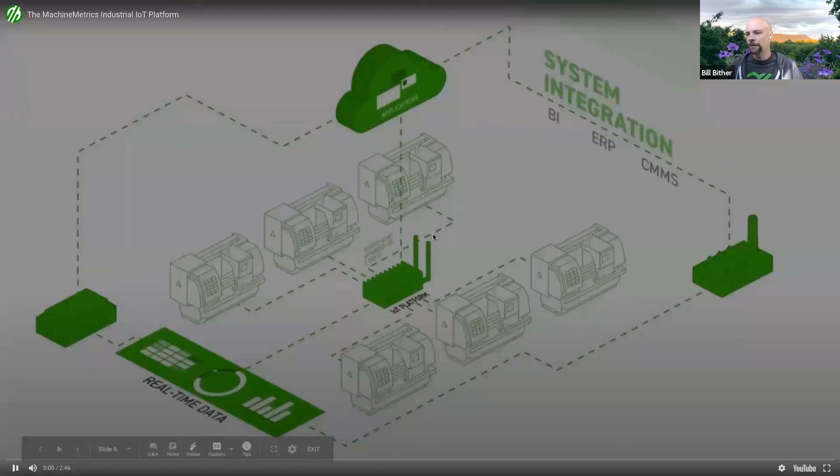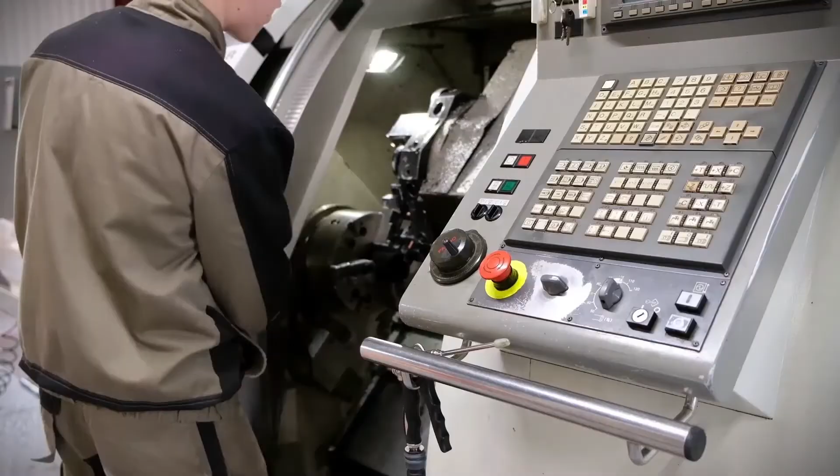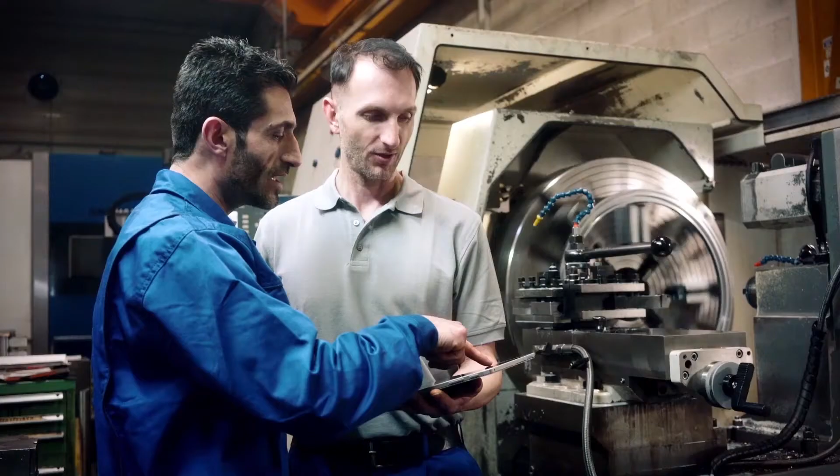Manufacturing produces more data than any other major industry in the world, yet has been slow to adopt the digital mindset transforming industries like agriculture, banking, and healthcare. Manual data collection is time-consuming and inaccurate. Operating on gut instinct alone leads to inefficiencies and poor decision-making that affect every component of a company's operation, from significant downtime to production losses. We're in the age of Industry 4.0, and manufacturers need every edge they can get to stay competitive. Real-time, actionable data is that edge.

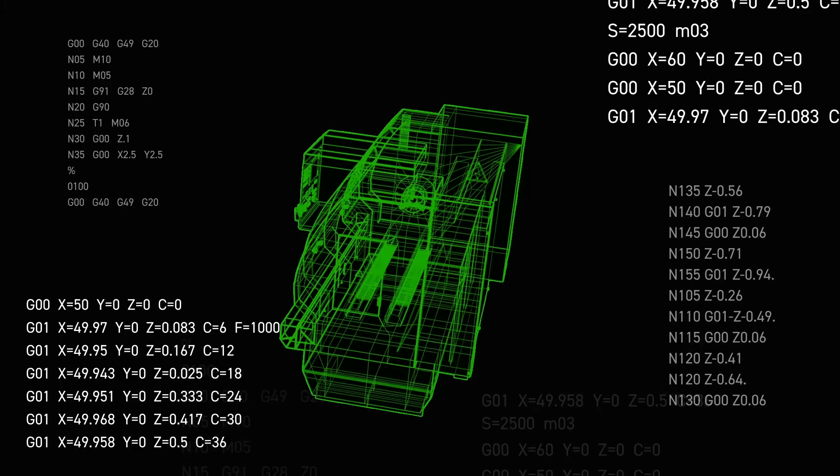Your machines generate hundreds of data points every millisecond, all of which tell a story of what happened in the past, what's happening now, and what will happen next. It's time you harness that data and jump-start your factory's digital transformation. MachineMetrics provides an intuitive, flexible monitoring platform that easily collects data from any piece of manufacturing equipment and transforms it into powerful, actionable insights. Why does MachineMetrics succeed where so many others have failed? The key is in our ease of use and time to value.

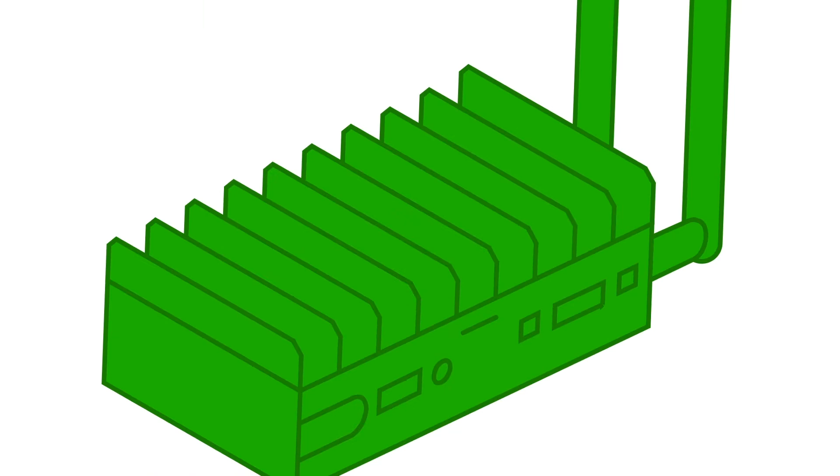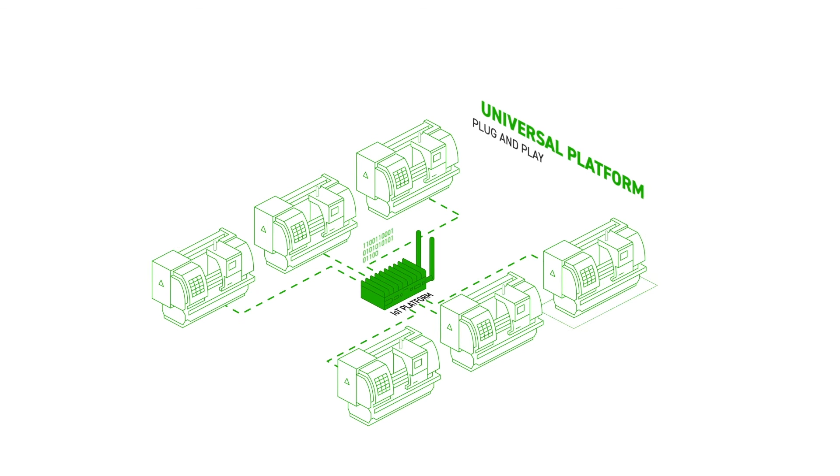The MachineMetrics IoT platform is easy to install and implement. You'll start visualizing data in a matter of hours. Plug-and-play edge connectivity harnesses and standardizes machine data across your entire fleet. Our intuitive, out-of-the-box apps are easy to use and drive rapid improvements in efficiency. Training is minimal. Real-time shop floor dashboards, machine production and condition monitoring, historical reporting, and automated alerts instantly enable visibility and analytics to help your team understand the big picture. Build your own apps or seamlessly connect with your current shop floor systems to easily integrate machine data across your digital factory.

MachineMetrics will help your team deliver the right information to the right person at the right time. Identify potential bottlenecks before they occur. Update cycle time standards in real time to improve pricing and scheduling. Detect anomalies and predict maintenance events before they cause downtime.

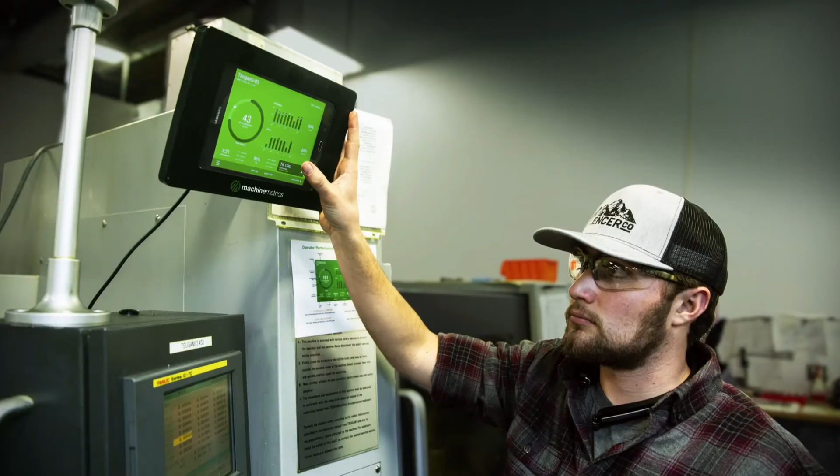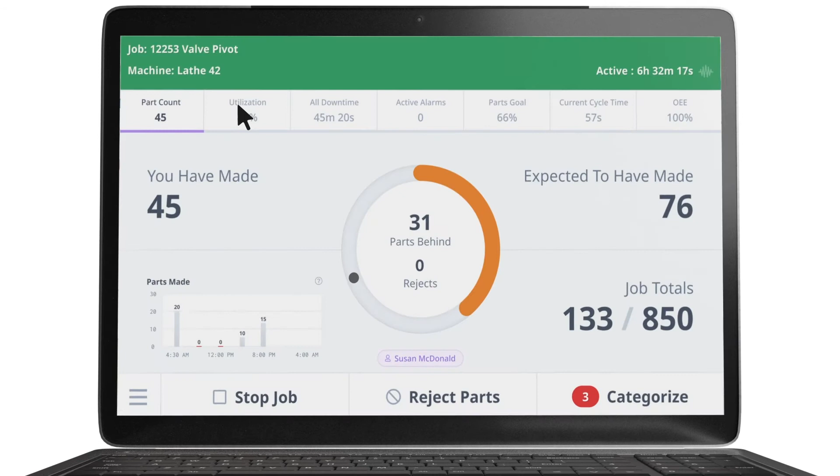Empower your workforce with step-by-step instructions to optimize processes. Enable lights-out manufacturing with remote monitoring and alarm notifications. With Machine Metrics, any manufacturer can start leveraging their machine data immediately to drive improvements and provide the foundation for scaling data across their operations.

It's time to start transforming your factory, all with the click of a button. Harness the power of machine data so it can become your competitive advantage.

So over the past 5 years, we've connected to thousands of machines across hundreds of customers worldwide in discrete manufacturing industries. Industries such as medical device manufacturing, automotive, aerospace and defense, oil and gas, and heavy industry. We have focus in metal manufacturing such as precision metalworking and metal fabrication. This has been our beachhead market and where we really got started.

So I want to talk a bit about the architecture of an industrial IoT platform, and in particular, how Machine Metrics works. So it is uncommon for manufacturers to have a data historian that includes all the data one needs to drive value. So our edge platform can be used to connect to any machine. Most of our customers install Machine Metrics themselves without any assistance from us.

Data is collected directly from the machine's control for modern equipment, or additional sensors can be connected to our edge device to connect legacy equipment. We automatically transform this data into standard data structures using our AI-driven transformation engine so that data can be scaled across many machines. This data can be collected at high frequencies. This allows data scientists to develop custom predictive algorithms that can be deployed back to the edge and managed at scale.

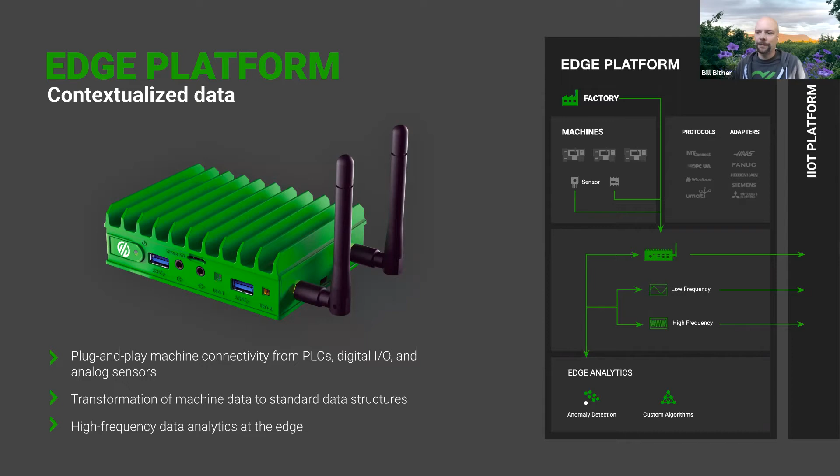So once the data is collected, it's streamed into the Machine Metrics IoT cloud infrastructure. This infrastructure is designed specifically for machines and a high volume of diagnostic and sensor data that's associated with machines. Operational data is layered on top of machine data to add additional context. Not only do we know the machine conditions, but if the machine is in setup, down for maintenance, and the part numbers that are being produced.

The machine and operational data is directly accessible to software developers and data scientists through our APIs and can be visualized through out-of-the-box applications or custom integrations. Patterns in this data generate insights that initiate actions through no-code configurable workflow triggers. These triggers can send notifications or initiate entirely new processes, including those built into Machine Metrics that are designed to optimize the operation of the machine.

Out-of-the-box applications drive value immediately after connecting your equipment. Examples of these applications include an operator interface to solicit feedback from operators and present prescriptive instructions during downtime events. Custom factory applications and integrations into other factory systems built by our customers and partners provide additional value from the machine data. Our customers have used Machine Metrics to digitize their factories and improve their operations. And they can build on top of this platform and build whatever applications they feel could be leveraged using that machine data.

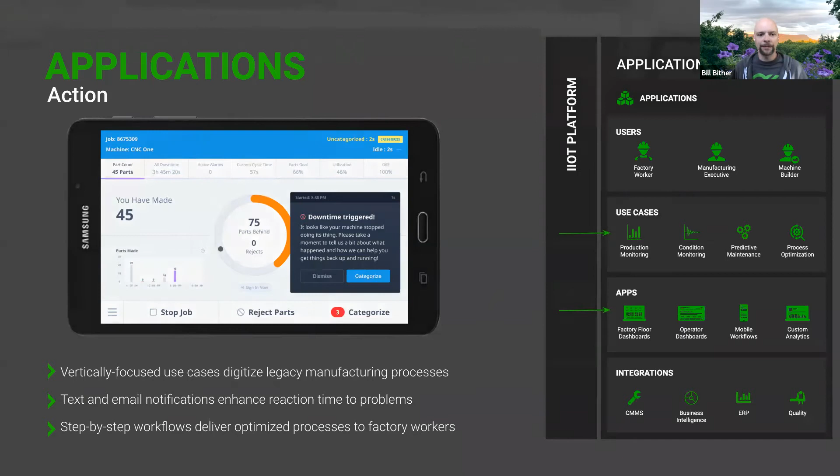So after the data is processed and transformed into a standard protocol, we use MTConnect. We can relate this machine data with another one that's very similar, and that transformed data is streamed to the Machine Metrics Cloud. The installation takes just around 20 minutes, and software on this edge device can be updated remotely through an over-the-air update to ensure timely security updates.

So this is where I really want to introduce the manufacturing analytics journey. We talked about the first step really is capturing that data and transforming it, but without the analytics, you really aren't seeing the value yet. So there's 4 steps to this journey. Typically we start with descriptive analytics.

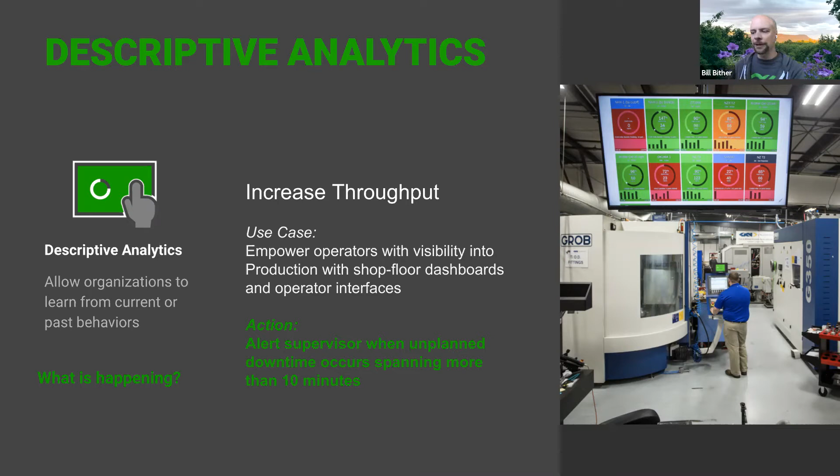So, and then finally, one of the things that you could do to really sort of close that loop is to set up these notifications that we discussed. So by alerting a supervisor when unplanned downtime events occur, this could be configured, say 10 minutes, or maybe it's even an hour. What that does is that lets the operator know that, well, my boss is going to get a notification if I don't bring this machine back up and running. So it can really be helpful in terms of keeping those machines running and increasing your utilization.

So the next use case that we commonly see really is around identifying the true cycle times. Often what we see is that cycle times, like when a part is designed, you have a particular amount of time that it takes to create that part. Say it's 5 minutes. But once that part is actually being produced, you'll find that an operator or programmer needs to make a tweak to the program. This particular cut needs to run a little bit slower, or we need to add a dwell. And what happens is that 5 minutes can turn into 7 minutes, and the loop is not often closed.

So that ERP contains that cycle time data that's used for quoting, but you can often be actually producing these parts and quoting these parts that are going to be running with minimal profit. So by having the actual cycle times and feeding that back to your ERP, you can improve your profitability and really just improve the data that you have for planning your jobs, and you can ensure that you're not going to be delivering your parts late. So it really helps in your on-time delivery.

And further, you can set up notifications so that when your cycle times change, you can notify the programmer or the supervisor to know that something is different here. And then if you want to go a little bit deeper, building the integration with an ERP means that you can automate that process, cut that manual process out from updating your cycle time standards.

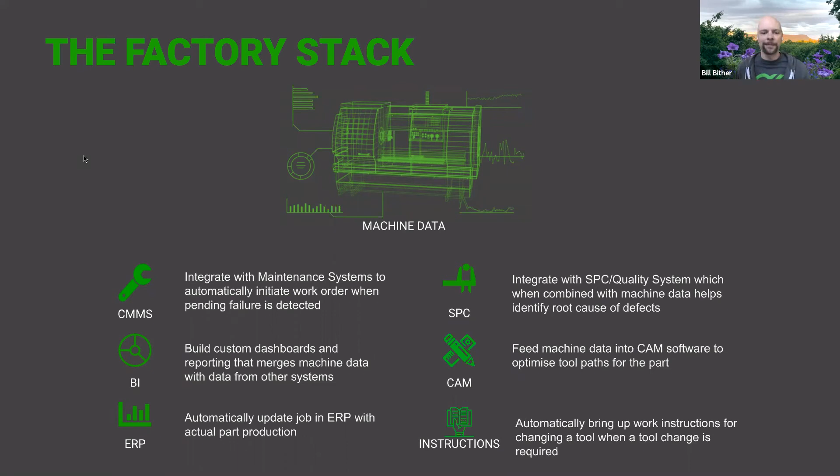So when you put this all together, really you're building out the digital thread for manufacturing. And it really starts with capturing data from your equipment, transforming that data, applying analytics to that data, driving action from that data, and then enabling other systems and processes with that data. And this is really what I consider the digital thread. The digital thread of manufacturing is about connecting digital information through product design, manufacturing, inspection processes, all around making the product. But it's also about connecting data from your OEMs, your equipment providers, to your supply chain, and really the consumers of your products.

And this digitization really enables new processes and business models, more automation and efficiency. Layering custom services on top of this is really what provides that value that's unique to you as a manufacturer. This is what provides that differentiation that will allow you to be competitive in the age of manufacturing.

So I'd like to talk a little bit about how some of our customers have really leveraged machine metrics. Here's an example of our customer Altec. Okay, we have some customers in different stages of the analytics journey. Many have experienced dramatic increases in their machine utilization and productivity. Now, Altec, they're a world leader in bucket trucks serving electrical utility and telecom. You might see their vehicles when you're driving by and you see a power line being repaired.